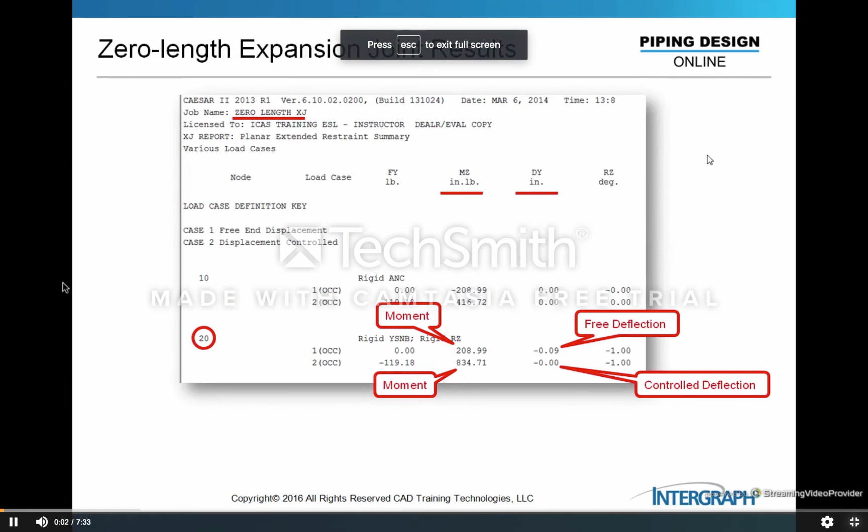So we have one more term to collect from the catalog. That would be our torsional stiffness in our joint. Now, expansion joints are extremely sensitive to axial rotation. Therefore, either you specify the proper stiffness or you check the total rotation on the joint, the total torsion on the joint, and make sure you're less than the value.

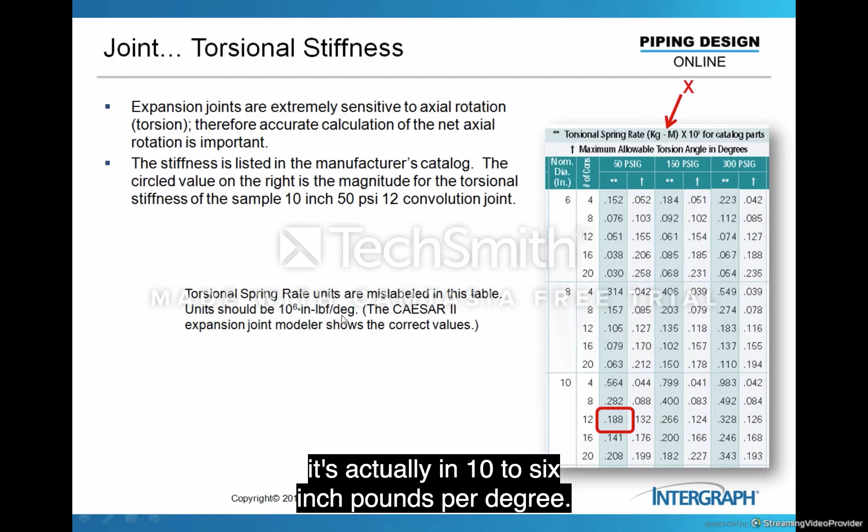The stiffness value in the Senior Flexonics Pathway catalog is not in the same table. They have a separate table for torsional spring rates. One note, if you're using this catalog, this is the wrong title on here. It's actually in 10 to the 6 inch pounds per degree. And CAESAR II has the proper value in its catalog.

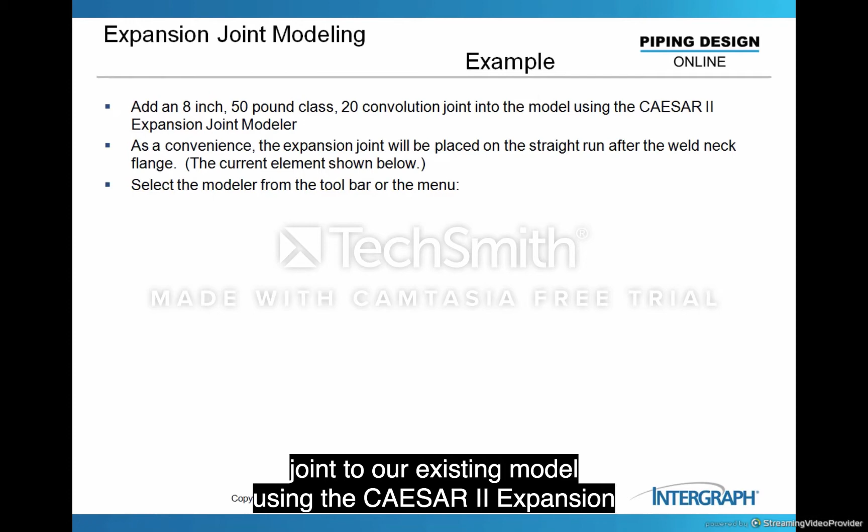Now, let's take a look at an example. We're going to use the expansion joint modeler in this example. And I wish to add an 8-inch, 50-pound class, 20 convolution joint to our existing model using the CAESAR II expansion joint modeler. Now, what you will do first is select the modeler from the toolbar.

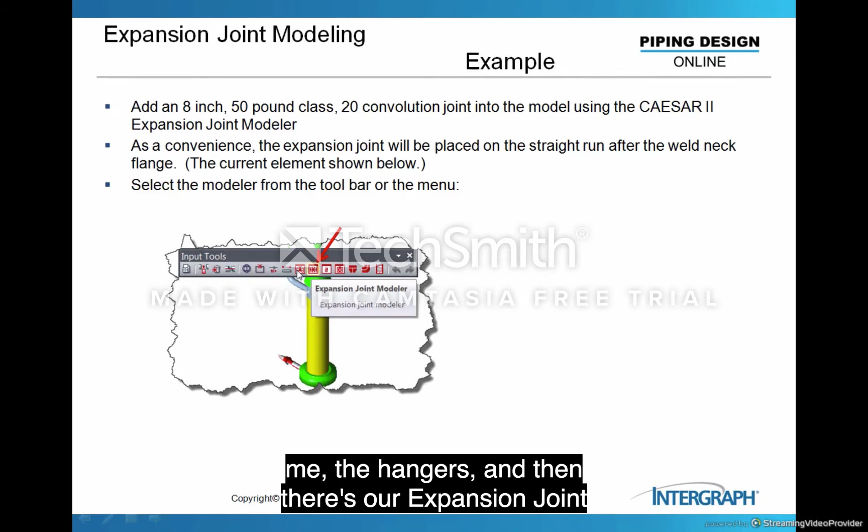If you're familiar with the toolbars, there's a group of red toolbars. By default, they're down the left side of the program input screen. And the first are the hangers, and then there's our expansion joint modeler. Click on that button, or you click on the menu under Model Expansion Joint. Also, Control-J would do the same thing.

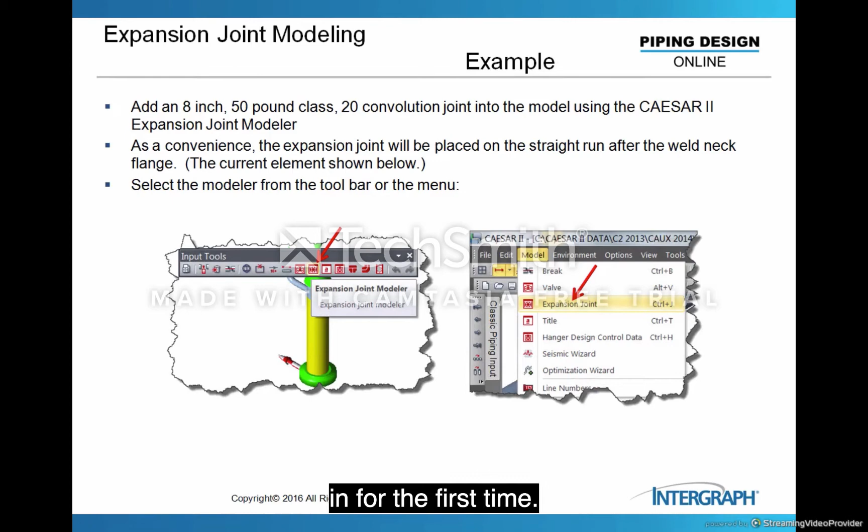But pick the icon or pick from the menu, and it'll open up the expansion joint modeler, and you focus your highlight on the element where you wish to put the expansion joint. Now, we are dropping in an expansion joint on an existing model. You might be putting an expansion joint in for the first time. So you're creating a new element and then calling out the expansion joint for that element.

When you click on the expansion joint modeler, you will see this menu for Senior Flexonics Pathway. Other manufacturers who have given us data may not have the same layout, but it's a similar process. You will then just select the items from the list here. Pressure class, the style, there's untied, tied, hinged, gimbaled, untied universal, and tied universal joints. Those are the groups we have here.

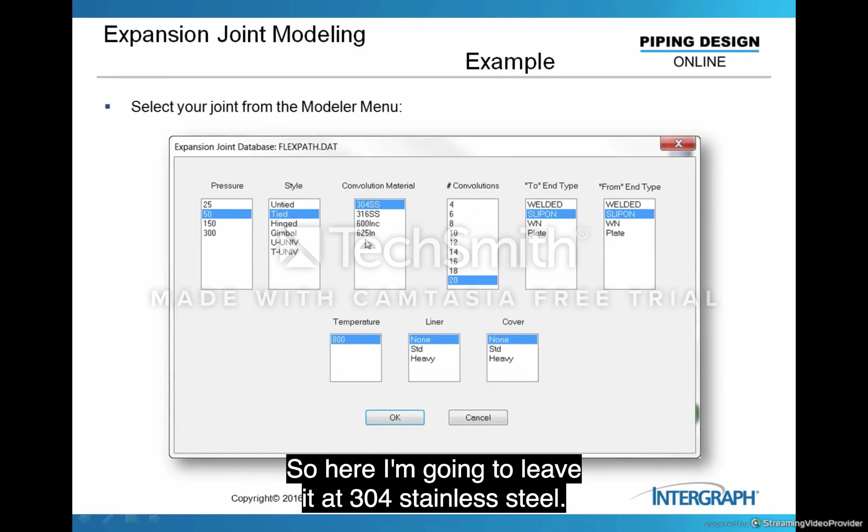Then convolution material. This would be a function of what type of service, the corrosion considerations, erosion considerations. So here I'm going to leave it at 304 stainless steel. Convolutions. In fact, there are more convolutions listed here than in the catalog, but you can buy pretty much anything you wish, even odd numbers. But here's the ones that we are issued. I want to pick 20 convolutions.

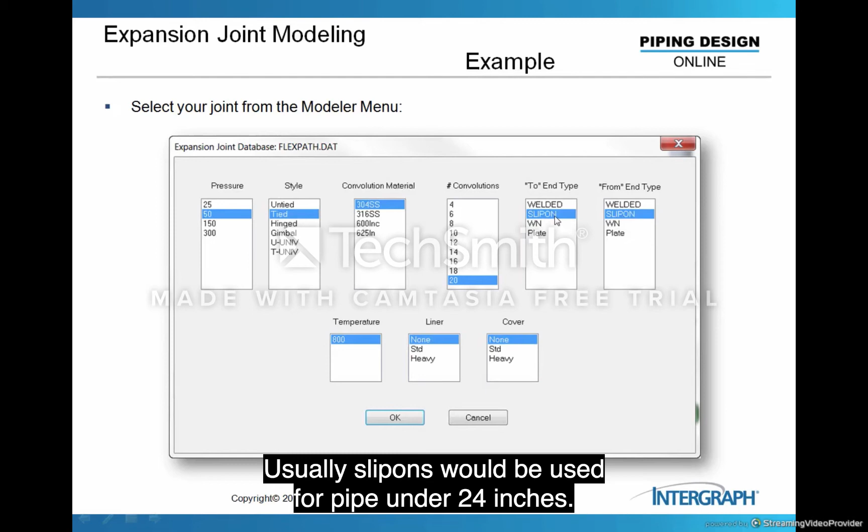On the end type, we have both the from end and the to end of that element. I'm putting on slip-on flanges on either end. Usually slip-ons would be used for pipe under 24 inches. Above 24 inches, it might be plate flanges. Now on the bottom part of the screen, we have 3 columns. The temperature of the joint, the liner inside the joint, and the cover outside the joint. The liner and cover do not change anything other than add dead weight to the overall joint.

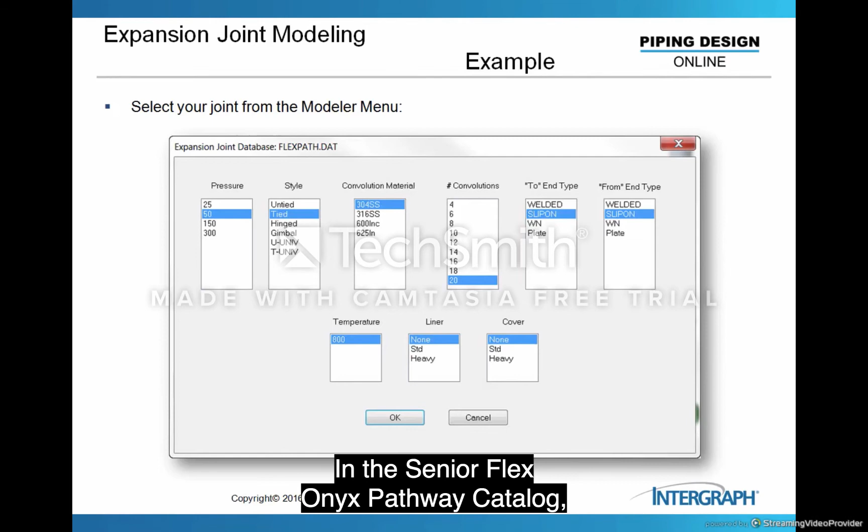Temperature is an interesting term. There's only one temperature here. This is the test temperature of the expansion joint. In the Senior Flexonics Pathway catalog, the stiffnesses that they list in the catalog are the stiffnesses at the test temperature. Now, this is 800 degrees Fahrenheit. If I run my system at 800 degrees Fahrenheit, then I have the proper stiffnesses.

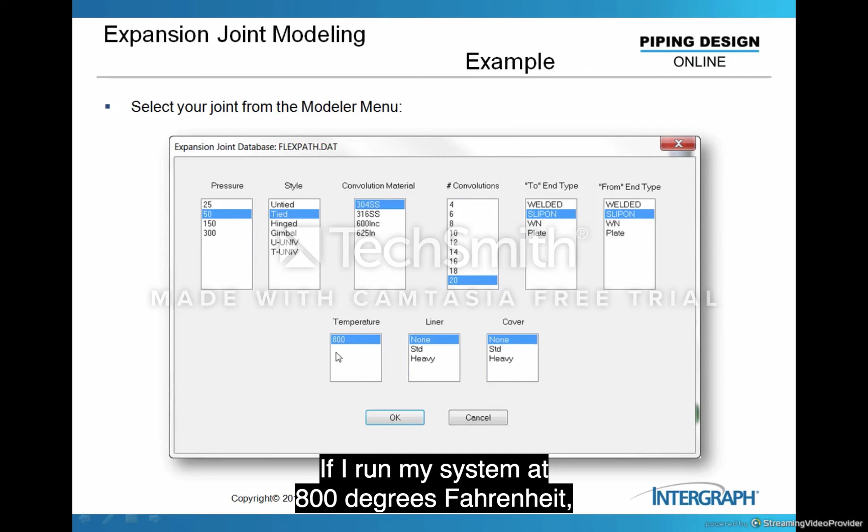If, however, I have a system at a lower temperature than 800 degrees Fahrenheit, this processor here will allow me to modify the stiffnesses based on that change in Young's modulus. So you can get a stiffer joint if it's lower than 800, even more flexible joint if it's above 800. So that could be a useful term in some of these expansion joints.

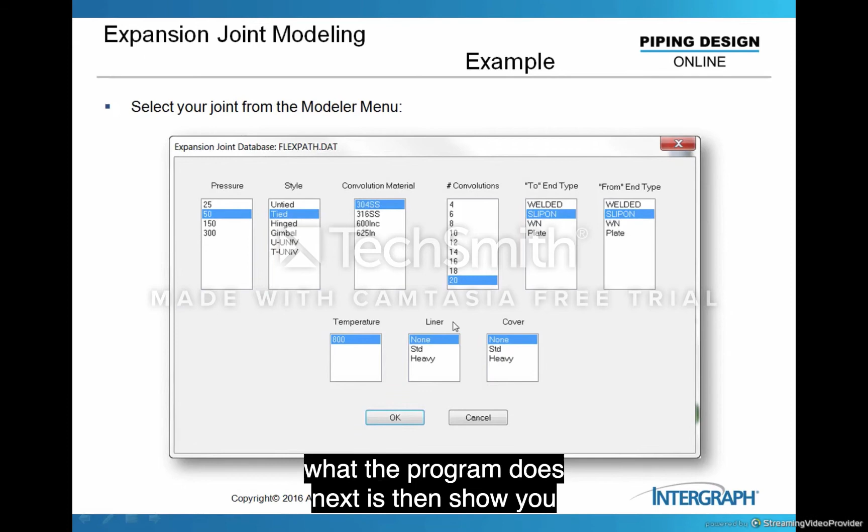When you push the button, you say OK, what the program does next is then show you this screen here saying, OK, we were going from 20 to 30, that was one element, and now we have all these elements in this whole list. We have our slip-on flange, the expansion joint, then the slip-on flange on the other end, and then the remaining pipe.

So it's still going from 20 to 30. But now we have another element, 20 to 24. Where's 24? That's the tie rod model, going right up the middle of the pipe. We'll take a look at that a little bit later. And then we're going to relate 24 back to node 23 to define the tie rod action.

The bottom of the screen lists the stiffnesses, axial, lateral, angular, and torsional stiffness of the joint, this joint right here. And it lists the as tested stiffness, which match what's in the catalog, but it also lists this adjusted stiffness. If we click yes, we wish to adjust for temperature, we can then use these stiffnesses, and you see it's a little bit stiffer.

One other item that is listed here is the allowed motion of the joint. This is overall length, and this is the same data that we saw in the catalog. In fact, there's another piece of data here, the torsional allowed movement. So if you click build, it will drop this expansion joint assembly into the model.

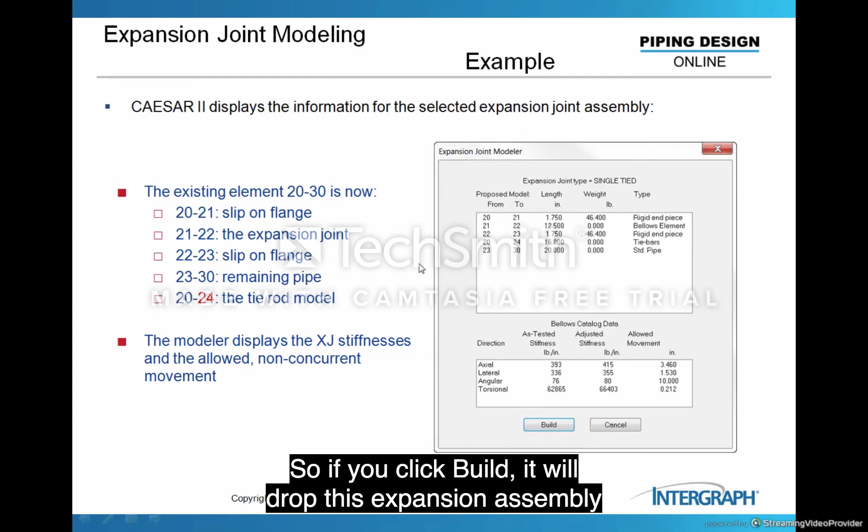And here's what happens. Here's that node 20 to node 30 up here at the top. 20 to 21 is the slip-on flange. 21 to 22 is the expansion joint. It's 12 and a half inches. Here are the stiffnesses from the catalog: 415 axial, 355 transverse, bending is left blank, effective ID specified, and also the torsional stiffness. So that's what the catalog will give you, or the expansion joint modeler will give you.

Let's take a closer look at that tie rod model that I mentioned earlier. Here's the element from 20 to 24. 24 is the same location in space as 23. That's the end of the flange before we get back to a regular pipe. This is a rigid element. It shows a very skinny rod up through the middle of the model.

What makes it different is that we then put this node C-node pair between 23 and 24. This will keep the two plates equidistant from one another, and it will not allow the rotation between the two flanges about the X or Z axis. So this is the key to setting the tie rod model in the expansion joint modeler.

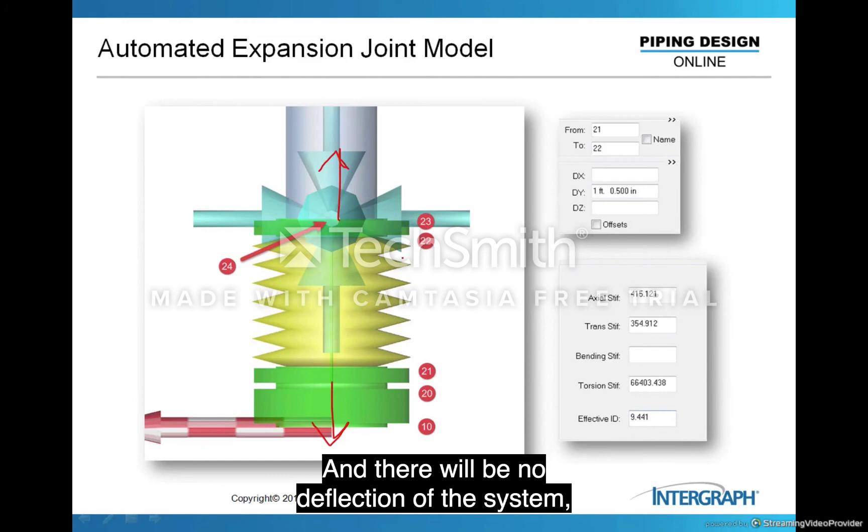Again, in our input, we also have the effective inside diameter, so the program will automatically drop in the axial load up and down, and that load is equal to the pressure times the effective area of the joint. Since we have the tie rod model working in the Y direction, that load will be just putting the system in tension, and there will be no deflection of the system because you're just pulling on the tie rods.

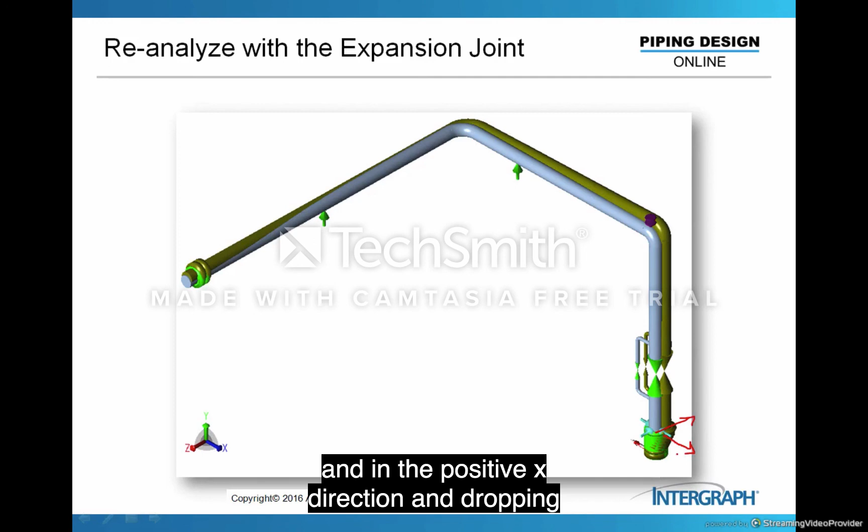Now, when you put that expansion joint in the model that we've been working with, right on top of the top discharge nozzle, we can see that it moves around a little bit. And that's why we have the expansion joint in here. We want to see it move in the negative Z direction and in the positive X direction, dropping those large bending moments on our pump nozzle down here, allowing this thermal growth to work by pulling the expansion joint around. When you didn't have the expansion joint in there, it couldn't move around. Now it can, and this is going to be a more relaxed system, much lower loads on our nozzle.

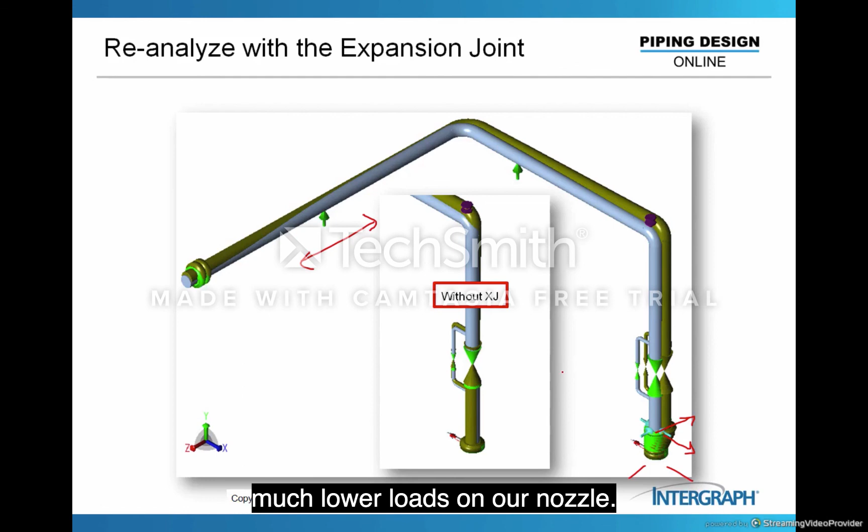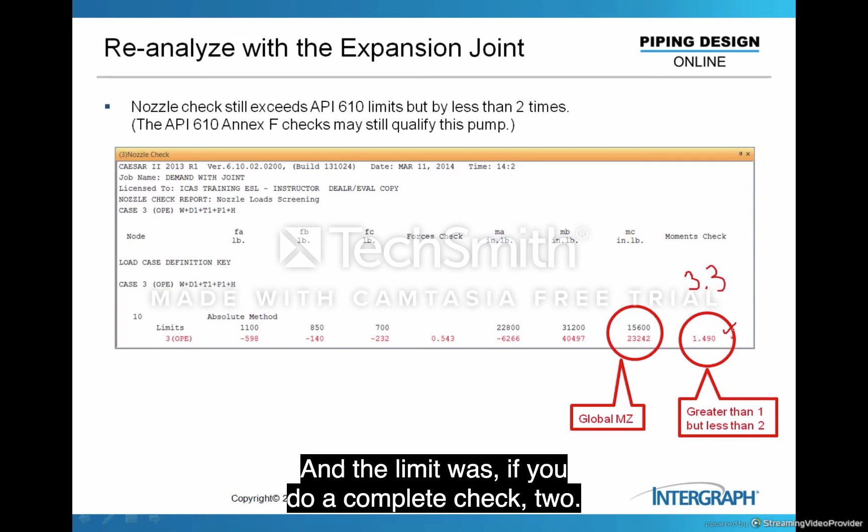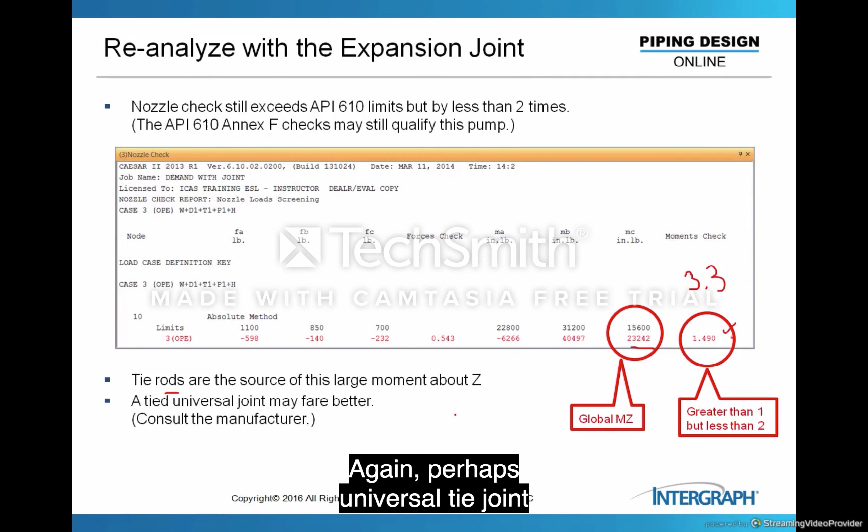So if you run this through CAESAR II, we see that the bending moments drop. This used to be 3.3 over here, and the limit was, if you do a complete check, 2. So now we're below 2, and perhaps we can save this system without any additional work. Now the question might be, where did I get these large Z moments? Didn't have them before. Those were rather low compared to where they were earlier, and it's mainly from the tie rod model. Again, perhaps a universal tied joint would be a better application in this situation.

Now, another thing we have to do with this joint is evaluate it. Is this the proper joint for the application? And we'll take this point up in our next session.